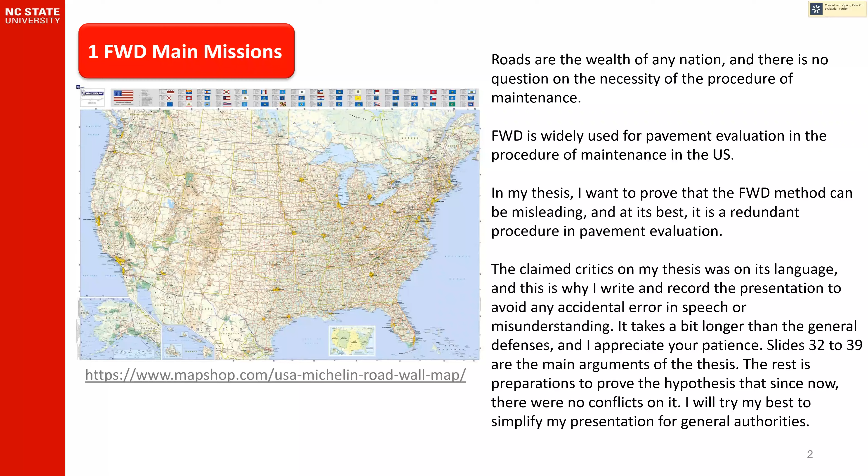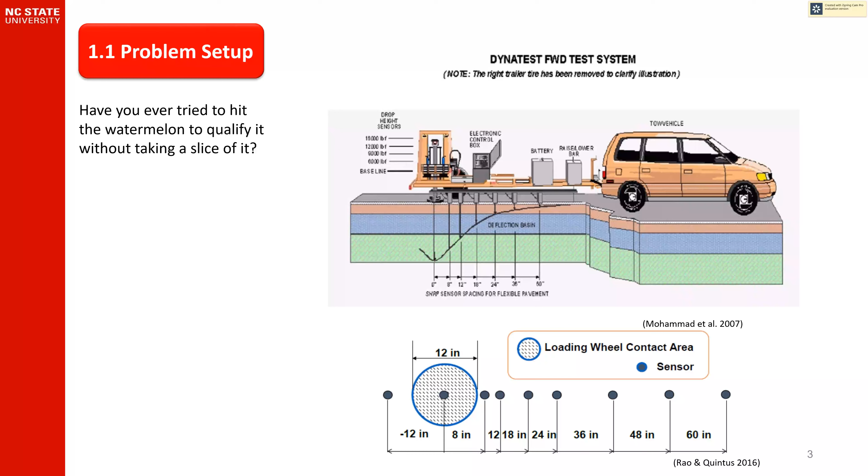Have you ever tried to hit the watermelon to qualify it without taking a slice of it? The idea is the same. We drop a weight on the pavement and we record its response at several distances. This is the area of the load, this blue circle, and in the center of that we have a sensor which measures for us the central deflection, at 8 inch, at 12 inch, and so on, with the hope that we can evaluate the condition of pavement by recording its response.

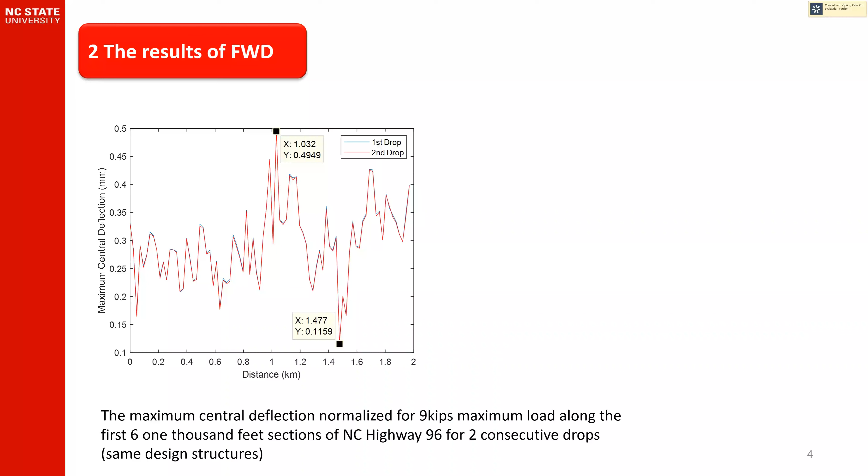We have 2 consecutive drops, and it shows us that at a single location, if we repeat the drop, it does not change much the response. We did it for the same design structure, so we did not use, for example, the intersections that have a thicker AC layer. As you can see, almost every 24-meter distance that we tested, we had a significant jump. For other sensors, the condition was not better either. Each point of the watermelon has its own specific voice.

What is the reason? Can we translate these point-wise deflections into some other quantities, such as a modulus of asphalt concrete or AC layer, which can be used for pavement evaluation? This idea that we change these deflections to some physical quantities, the properties of pavement, is called back calculation.

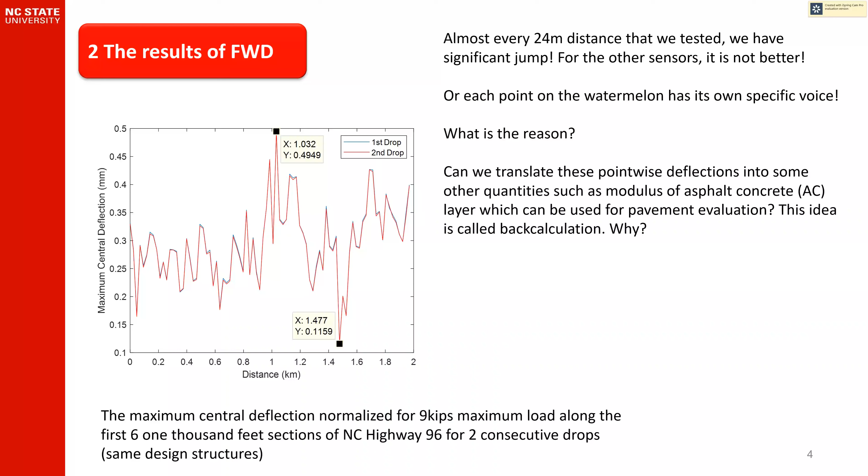But why is it called back calculation? It is because it is somehow backward. If we know the properties of pavement, most probably we are able to model that in a computer and then apply the load on that and see what is the response. But if we know the response, it is backward. So we want to know what is inside the pavement.

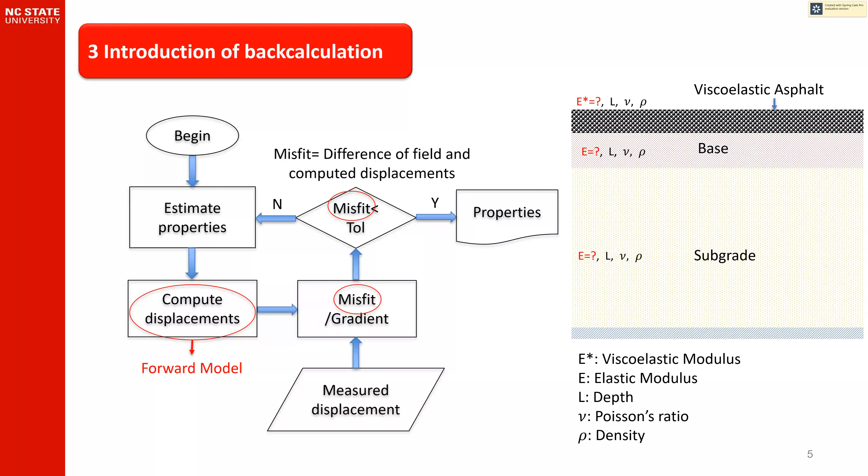So we should do it by trial and error. First we begin with an estimate, then we compute the displacement through a forward model, and we compare the measured displacement on the field with the forward model, and the difference we call misfit. If the misfit was less than tolerance, and we didn't face the problem of non-uniqueness, we assume we found the properties. But if it was more than tolerance, we cannot say that we found them, and we should go to the next trial and again estimate the properties, and this loop continues until we find the properties. This is called the procedure of back calculation, or inverse problem, inversion.

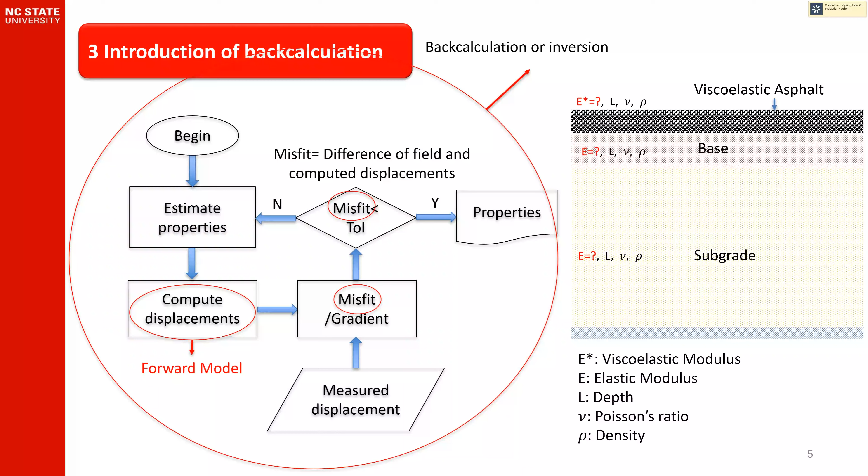As you can see, the forward model is a very essential part of that. If we cannot make a forward model, we cannot use this type of back calculation. There are unavoidable assumptions that all the programs in the literature consider, such as axisymmetry, continuity, and homogeneity, because we don't have in general information about the lack of axisymmetry in some pavement, or lack of discontinuities or inhomogeneity.

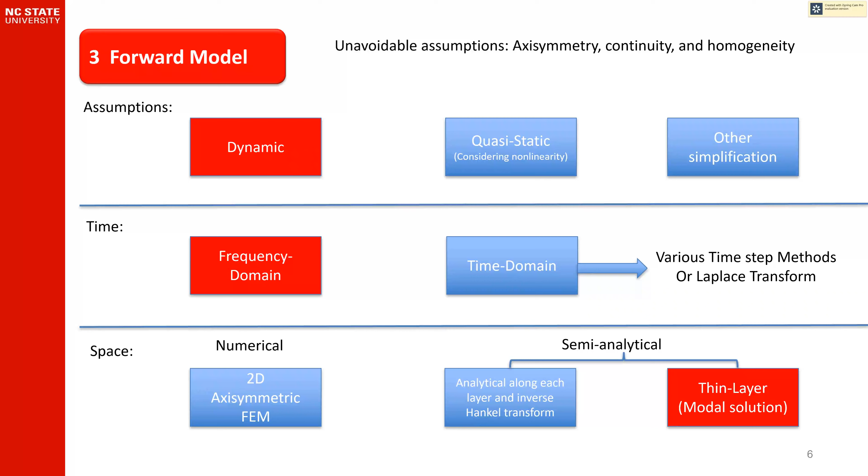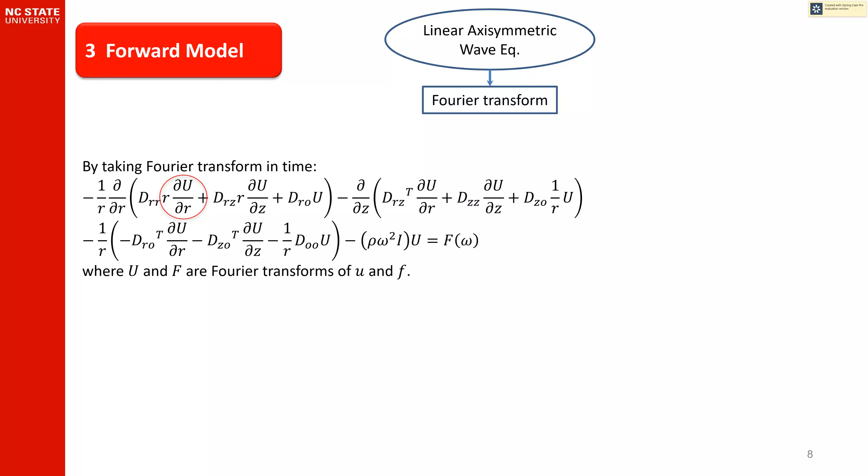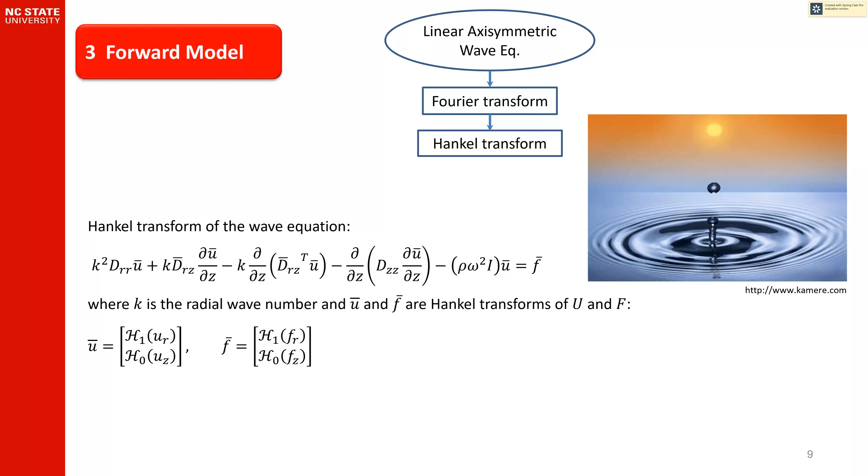Then we discretize in depth, and for the elastic layers we use CFEM, complex length finite element, which reduces the computational complexity because we want to consider the subgrade as half space. So we use a significantly large depth for subgrade, and if we use general finite element, we need to discretize it into many elements, which increases the computational complexity of solving the eigenvalue system. So we use the CFEM, which has exponential convergence.

You can see the details of that in my thesis, and also in its original paper written by Guddati, Druskin, Vaziri.

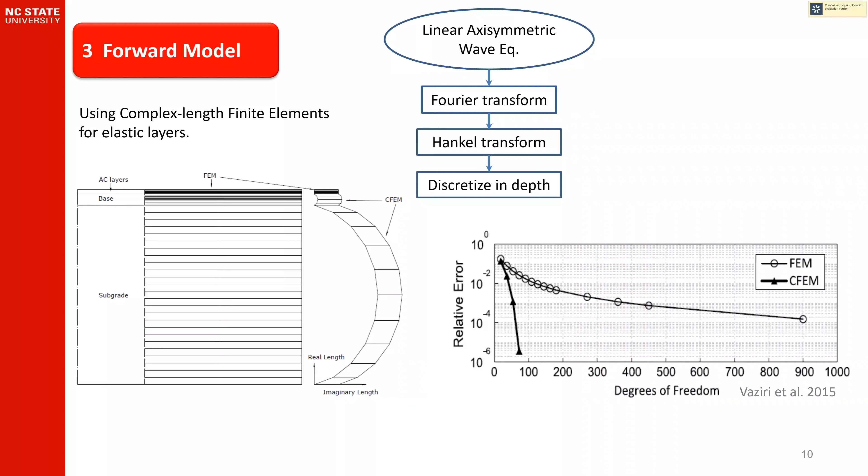So we have the system of equations. We solve for the general solution, and we find the eigenvalues, the radial wave numbers. In this case, we solve for the case which makes these matrices singular, and then corresponding to that, the eigenvectors, and then we have the modal expansion of that.

The closed-form derivation is made such that, based on each frequency in the vertical direction, and at each distance, you can find the vertical deformation.

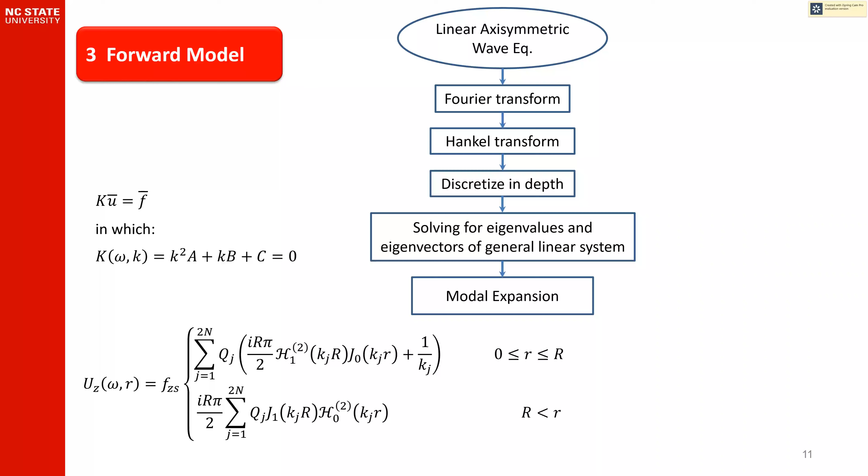To avoid solving this eigenvalue problem for every frequency content of the load, we use the Pade interpolation. The Pade interpolation is just division of two polynomials, one over the other, and it avoids the computational complexity, making things faster.

So instead of 10,000 solvings of the eigenvalue problem, we just use 40 Pade points and then interpolate in between. This was one of the ideas that was very helpful.

Then we can use the inverse Fourier transform and find the response in the time domain, which we can compare with the measurements in the field.

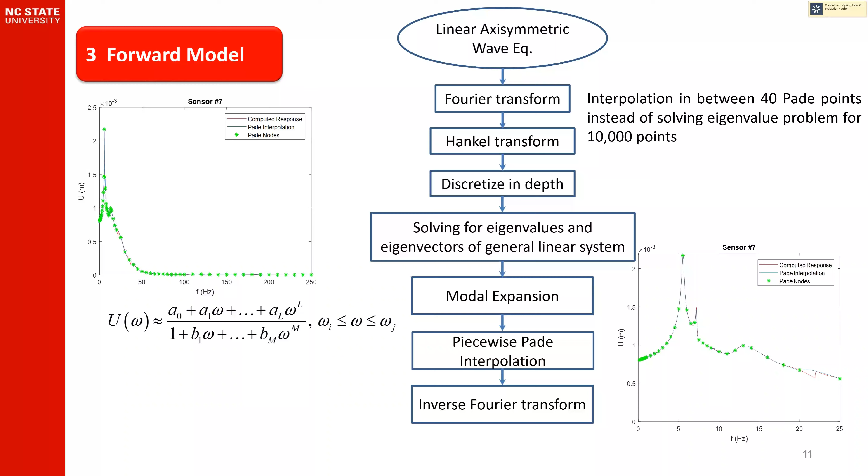So one of the main advantages of our forward model is that it is robust. For getting any intended level of accuracy, we can do a convergence study on that.

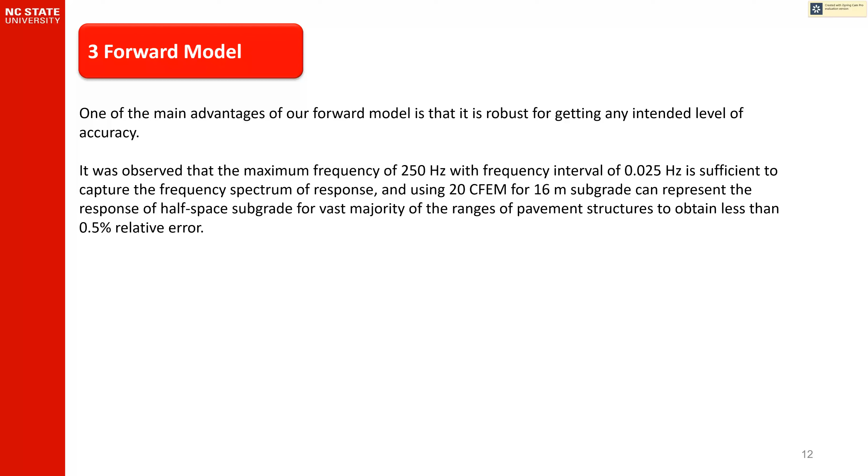It was observed that a maximum frequency of 250 Hz with a frequency interval of 0.025 Hz is sufficient to capture the frequency spectrum of the response, and using 20 CFEM elements for a 16 meter subgrade can represent the response of the half space subgrade for the vast majority of pavement structure ranges, obtaining less than 0.5% relative error.

So given the load, we can get the deflections at different distances, as you can see, from 0 inch to 48 inch in this case.

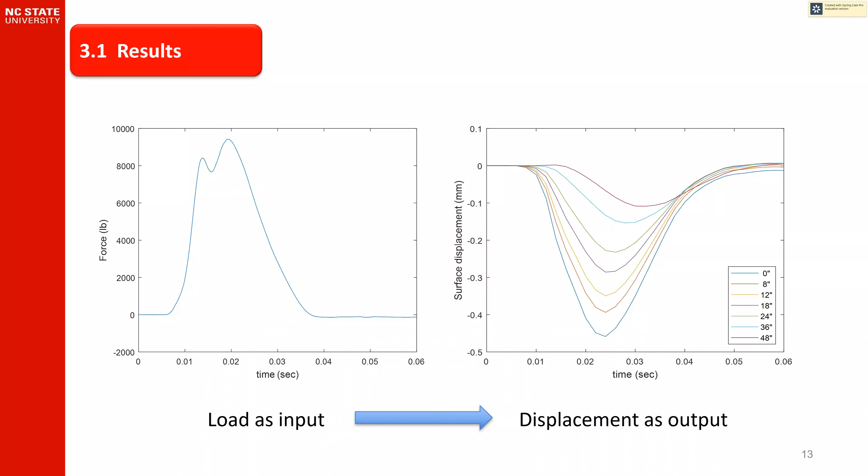So for validation of this forward model, the most important part is whether it is valid in reality.

We consider the NC96 pavement as a distressed pavement that we wanted to evaluate. The expert didn't observe any visible major cracks on the surface of the pavement, and we had 14 core samples that we tested out of 50 that were taken.

We found the modulus of the sublayers by dynamic cone penetration test and also previous data interpolations.

All 14 cases failed in prediction. For all 14 cases, the central deflection was significantly more than our predictions.

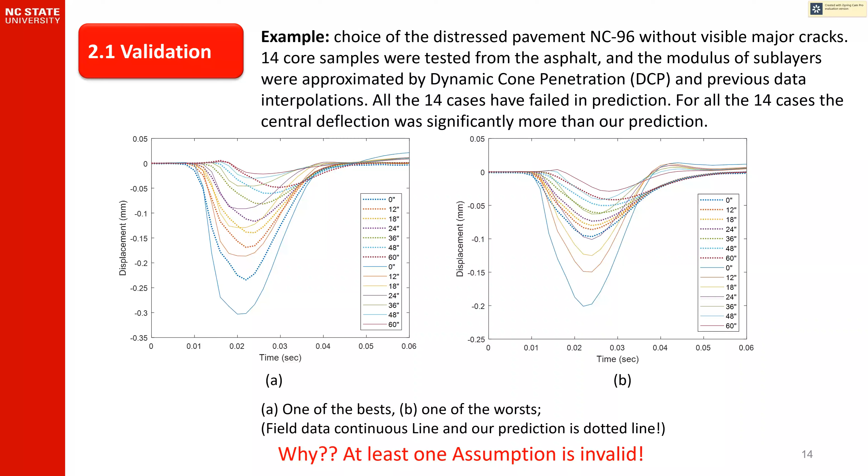As you can see, it is completely different, and sometimes we have even 100% error. Most importantly, the central deflection for all these 14 cases was always less than the experiment. Why? At least one assumption in our forward model was invalid.

So I make a hypothesis, and then I prove this hypothesis, as I will explain. So this is my hypothesis.

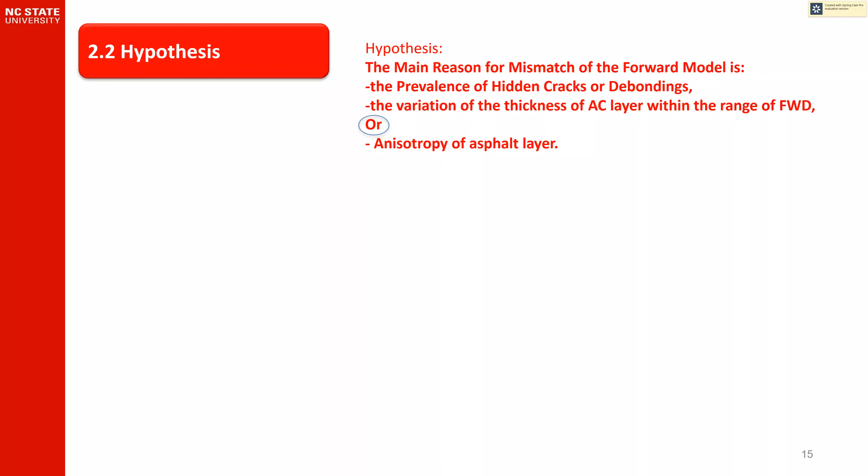The main reason for the mismatch of the forward model is the prevalence of hidden cracks or debondings, the variation of thickness of the AC layer within the range of the FWD, or anisotropy of the asphalt layer. Pay attention to this 'or' - at least one of these is true and significantly affects our data.

So first I explain the observation, what we observed through the field.

I explain the mismatch based on this observation, and then I refute the other likely possibilities. This is how I prove the hypothesis.

We observed 8 cases of debonding, major horizontal or vertical cracks, and stripping among 50 taken core samples, which we could not put under the dynamic modulus test machine.

Here is the schema: we have major hidden cracks or places of debonding, shown with green lines. We have the schematic size of a 6-inch diameter core as black circles, FWD loading area as a blue circle which is 12-inch diameter, area of 50 cores as the purple circle, and the radial distance of 60-inch for the last sensor of the FWD, shown as the red circle, to see the range of the FWD.

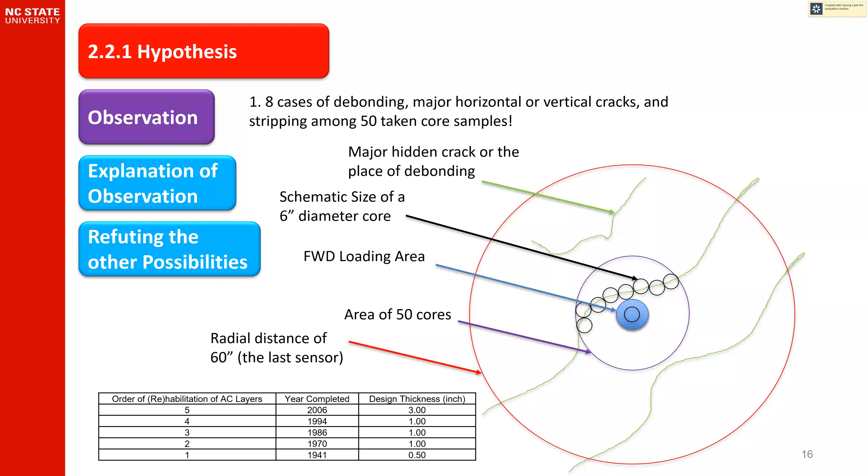The second observation was variation of thickness of the core samples from 18 centimeters to 27 centimeters for structure 1, along the 2 kilometers of NC96.

The third observation was that when we tested one of the cores in the vertical direction, we also took some horizontal cores out of that. We saw that the modulus of the horizontal cores was significantly less than the vertical modulus of the core.

Because the nature of the problem is bending, and in bending horizontal modulus is more essential to the stiffness of a structure, this is a very important observation that leads us to say that we cannot rely on the assumption of isotropy.

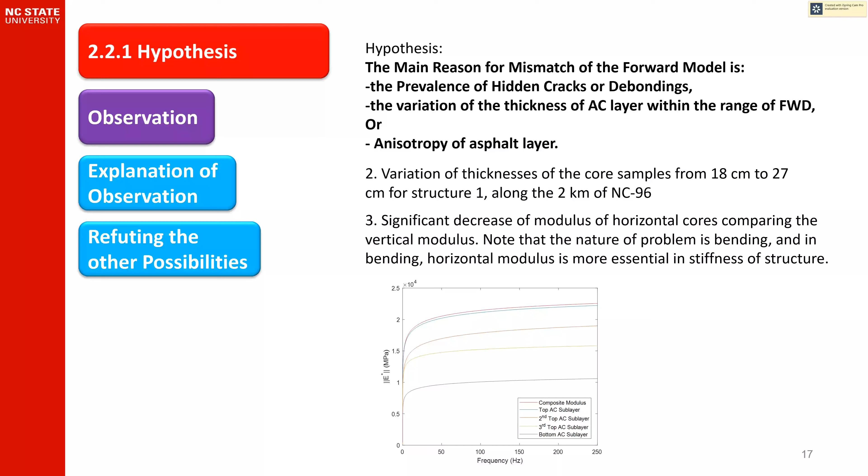We want to explain the mismatch in the data by these hypotheses, and we explain it with only two things. It might be possible to explain it by other factors, but explanation by just one of these hypotheses is enough to account for the observation.

Any discontinuity reduces our stiffness, thus increasing our deflection. If we have cracks in our pavement but assume it as continuous, we assume it as a stiffer structure, and then the deflections we find are less than the deflections we get in reality.

Also, if we have cracks that are in tension, they don't let energy transfer to the further sensors. For example, in this case between 12-inch and 18-inch, at 18-inch we suddenly had a drop in deflections—it seems the energy did not reach those sensors, and afterward also. So we can say these cracks are blocking the flow of energy, causing this phenomenon.

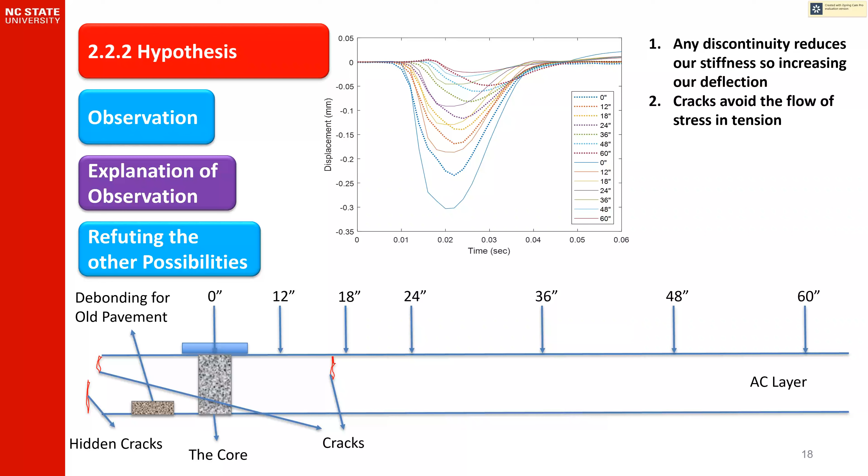For the other case, between 24-inch and 36-inch there was also a sudden jump in deflections, and the energy did not transfer. Remember this is just a plane—an axisymmetric domain—and these cracks and debondings can be inside the plane or outside of it, so anywhere is possible. By the way, these cracks are very tiny and could not be observed on the surface.

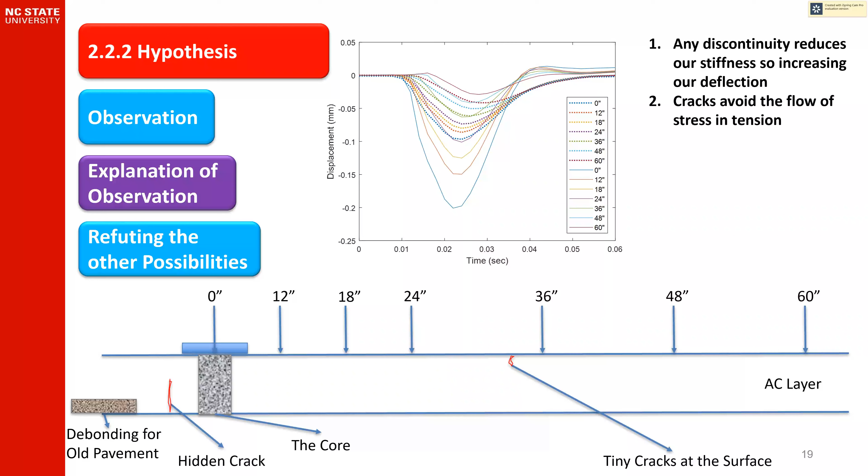Now we want to refute the other likely possibilities. Let's say we had inaccuracy in the approximation of input parameters. We want to adjust the input parameters such that, if we made a mistake in those, we could match the field data to our prediction.

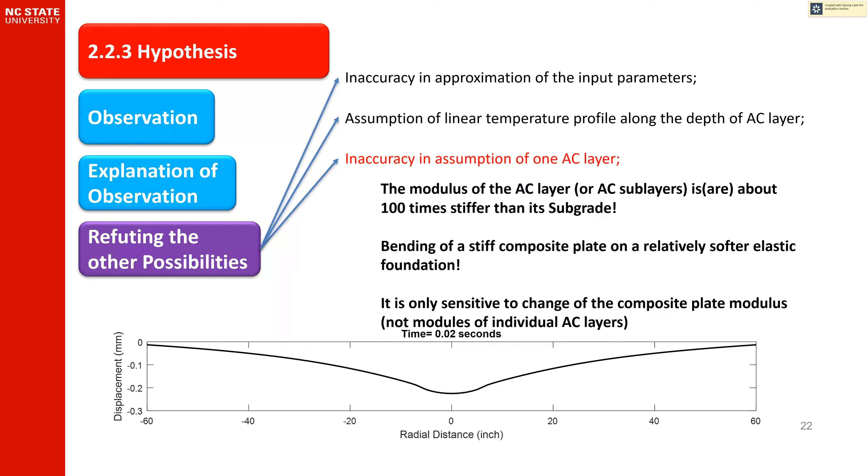We want to now show that it is only sensitive to change of the composite plate modulus, not the modulus of individual AC layers. Meaning that if we have the equivalent modulus of the AC layers as something, then if we change that composite modulus, we see the sensitivity. But if we go along the same composite modulus, then we don't see the sensitivity, and this is the space of non-unique answers that we faced when we were trying to do the back calculation.

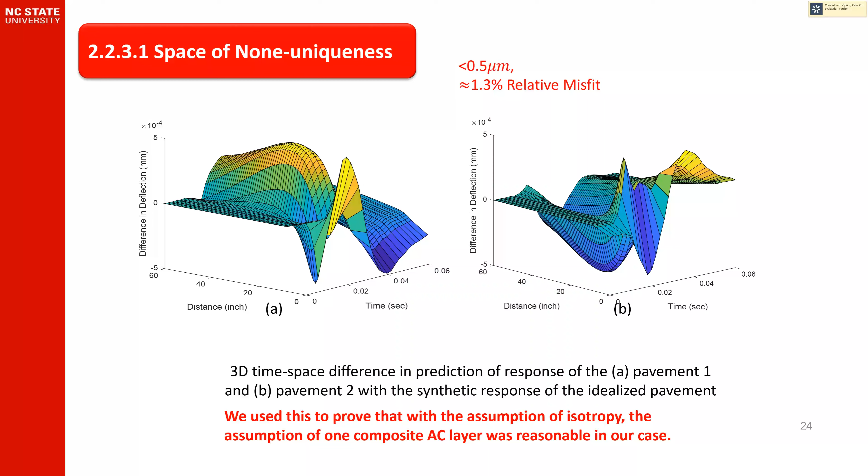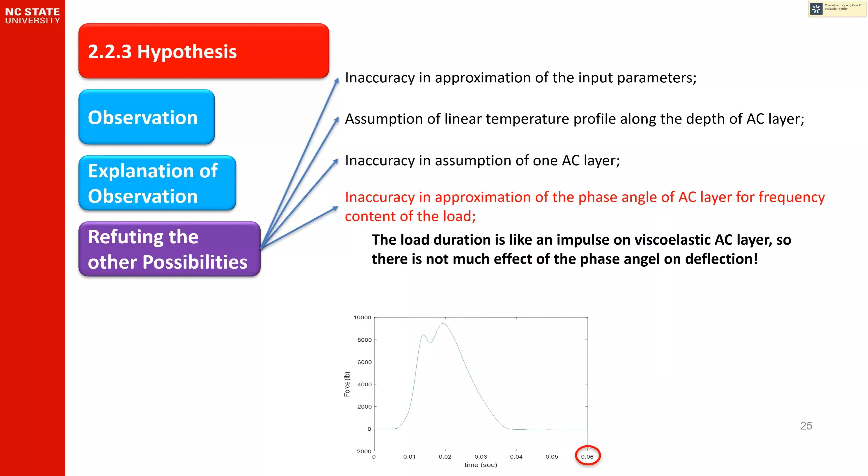What about the inaccuracy in the approximation of phase angle? I saw that the phase angle does not change much because we had an impulse, and this is the case for us. It is not changing more than 1%, with different approximations of that.

What about the inaccuracy in the extrapolation of the sigmoidal function? The frequency content of the response in the time history does not have that much share that we see the differences of that extrapolation. It is causing less than 1%, maybe 1.5% error in our deflection. So this cannot be the case either.

Error in the measurements of the field response - as we know, they do regular calibration based on the maximum deflection for FWD. So maximum deflection is completely matched, so it cannot be the case either.

And inhomogeneity within the mixture of the AC layer - because the different sizes of aggregates are not comparable to the size of our experimental setup, this is a good assumption that we consider homogeneity.

And also there was no accidental error. All these 14 cases had failed, and the 2 consecutive drops were also giving us the same deflection, so it cannot be the case that it was some accidental error during the experiment.

Also, there is no feasible method to gather the database for doing artificial neural network analysis considering the effects of these complexities. The artificial neural network requires a large database that, if we consider all the

possibilities that can affect our deflections, we gather the information and properties of those pavements and make a large database that covers all the possibilities. Then if we find the response of our pavement close to one of those possibilities, we can prove that there is no non-unique answer, so we can say that we found the properties.

So this is a way to avoid the forward model by computer. But since we don't have this database, and it is not a feasible method to gather this database for an artificial neural network considering the effects of these complexities - the cracks can be at any location, at any position - it is hard to gather, and also to know exactly where the cracks are, and the condition of that pavement. So this is not feasible either, and there is no guarantee that we do not face the problem of non-uniqueness for the artificial neural network considering the range of errors in field measurements.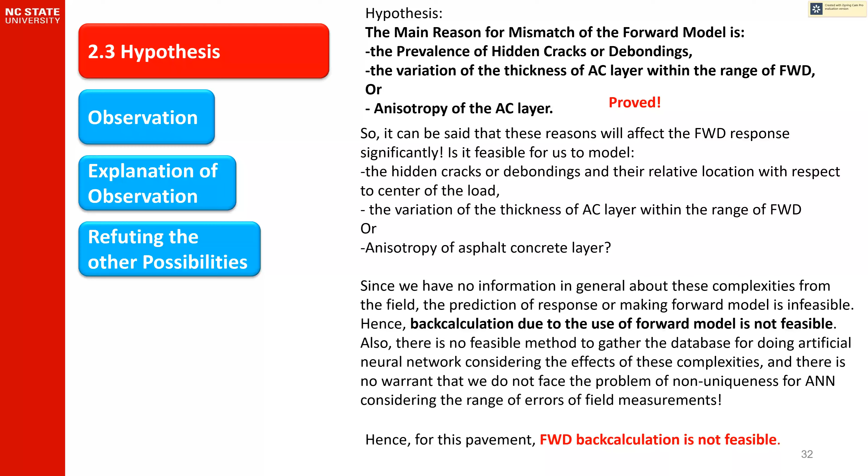Hence, for this pavement, FWD back calculation is not feasible. Almost every—

To answer the question we had initially in our lecture: can we translate these pointwise deflections into other quantities, such as modulus of the asphalt layer, which can be used for pavement evaluation?

No. This is only 2 kilometers of the 180 kilometer NC96. So obviously neither of these single points can be considered representative of the length of the pavement, and we cannot design the overlay or qualify the pavement by looking at any single point of these curves.

So there was an idea that instead of doing back calculation, we directly use these deflections in some way - let's say, for example, elastic back calculation - and then design the overlay based on that.

But the thing is, which one do we want to design for? Do we want to design based on 0.4949, or based on 0.1159? If we design for 0.1159, it might not be effective for 0.4949, and if we design for 0.4949, it might not be efficient for 0.1159.

We want to design for the length of the project, the length of the pavement.

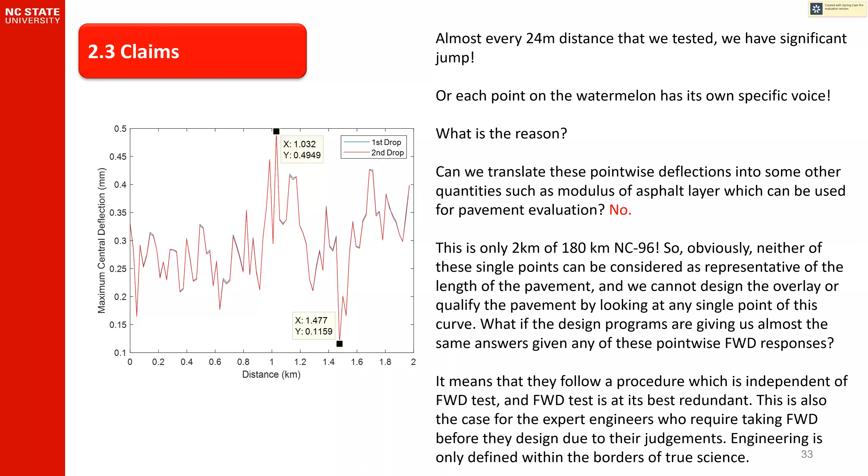So what if the design programs are giving us almost the same answers given any of these pointwise FWD responses? Maybe some design program says that even though I have high variation, I just give you the answer that is efficient and effective for all these. It means that all the programs are using only single FWD data currently, following a procedure independent of FWD test, and FWD test is at best redundant. This is also the case for expert engineers who require taking FWD before they design due to their judgments. Engineering is only defined within the borders of true science. We cannot claim something as engineering which is not scientific.

Someone may offer that we evaluate pavement by a sufficiently large number of these pointwise data. Can we? We use again our proved statement of hypothesis: FWD response is highly sensitive to prevalence of hidden cracks or debondings, significant variation of the thickness of AC layers within the range of FWD, or anisotropy of asphalt layer. Cracks or debondings always increase the deflection under the load, so any type of averaging technique will not eliminate their effect. If the cracks increase, so the average is also increased. It is not a random uniform or normalized distribution that cancels out these errors. This is why we need scientists to decide.

Also, we witnessed a high variation of the AC layer thickness along the pavement. Pay attention that along the pavement we had variation between 18 centimeters to 27 centimeters, as observed from the cores that we took, but in our hypothesis it was within the range of FWD. In general, the AC layer is significantly stiffer than its supported layers, and the variation of thickness of AC layer has a significant effect on the stiffness of the pavement and so its response. Core modulus proves that we cannot have a generalized anisotropy along the pavement. All the core properties were different, so we cannot generalize the modulus along the pavement. We have no information about any of these complexities to eliminate their effects by any generalized function.

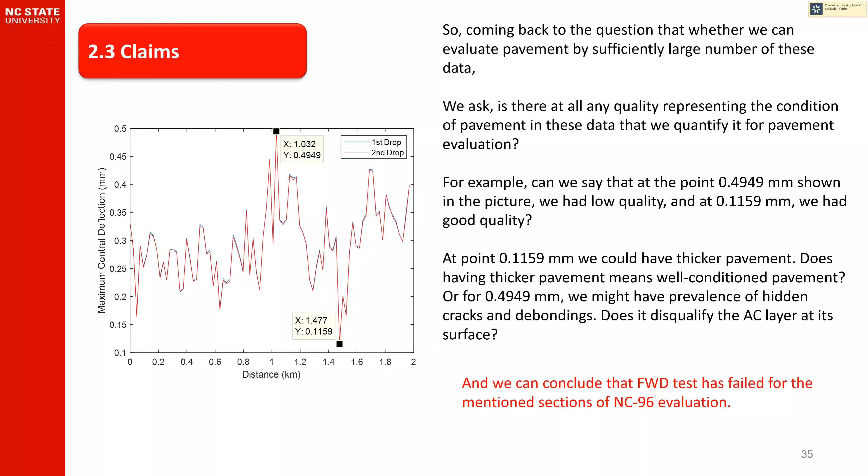So coming back to the question of whether we can evaluate pavement by a sufficiently large number of these data, we ask: is there at all any quality representing the condition of pavement in this data that we can quantify for pavement evaluation? If there is no quality, how do we want to quantify it? For example, if we can say that at point 0.4949 millimeter shown in the picture we had low quality, and at point 0.1159 millimeter we had good quality, can we say that? At point 0.1159 millimeter we could have thicker pavement, and does having thicker pavement mean well-conditioned pavement? Or for 0.4949 millimeter we might have prevalence of hidden cracks and debondings. Does it disqualify the AC layer at its surface?

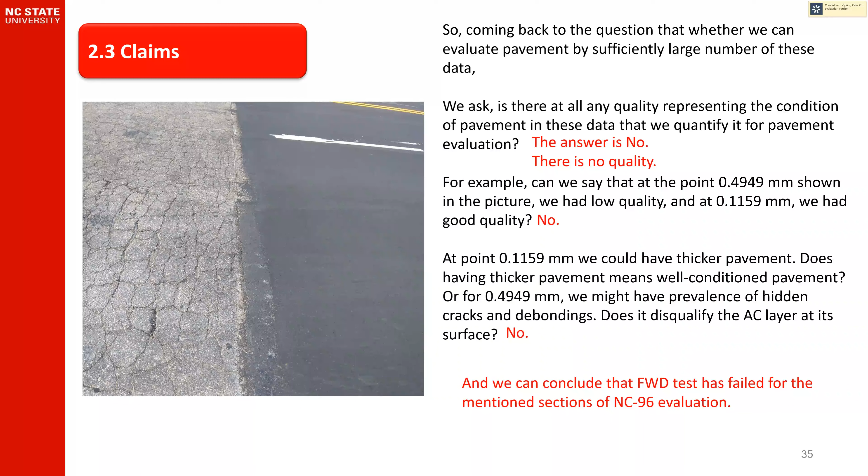Here I took this picture just on Avent Ferry Road, in front of the Burger King. There is just new asphalt on top of a very distressed pavement, and this does not disqualify it. When we have hidden cracks or debondings under the pavement, it doesn't disqualify the pavement on its surface. So the answer to all these questions is no, there is no quality. And we can conclude that FWD test has failed for the mentioned sections of NC 96 evaluation.

Definitely it failed. Can we generalize that FWD fails for all pavements? No. Right now in my thesis I don't claim that, but I was also able to prove, based on my program, that even for the idealized pavement, because of the non-unique answer and the lack of accuracy in the measurements and known and given parameters, we cannot do the back calculation even on the idealized pavement. But now I just consider no. We don't conclude right now, and we don't need to conclude, and we see why.

What we refuse is the reliability of FWD. Without any proof, FWD companies are charging taxpayers for their claimed experiment. We found that it is not working. For example, we proved by rejecting the general statement that it is a reliable test, widely used, by a contradictory example. So we have the right to say it is not reliable as a general statement, before they can prove what are the limits of the application of their proposed method.

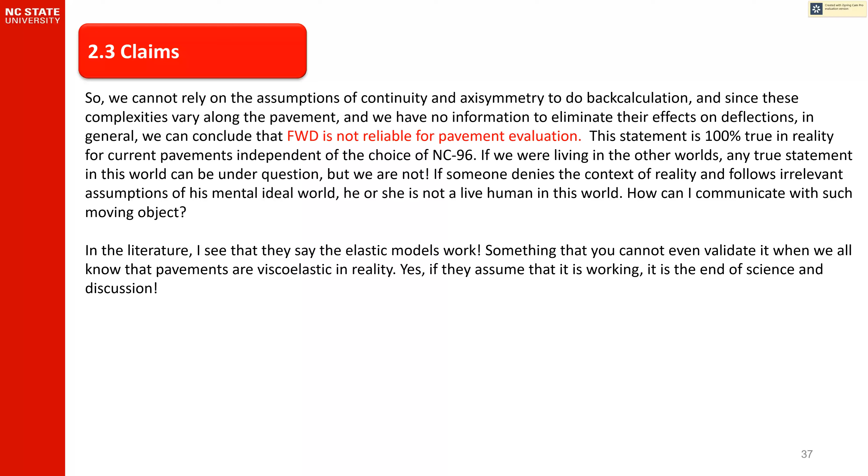In the literature, I see that they say the elastic models work, something that you cannot even validate, when we all know that pavements are viscoelastic in reality. So all these years they were assuming something, and they made programs for that, that you cannot validate, you cannot see if it gives you something true. And then they say that it works. If they assume it is working, it is the end of science and discussion. If you assume something is true, there is no discussion on that.

So in summary: can we do back calculation for this pavement? No. Can we rely on any single of these data points for our design or decision making for this pavement? No. Is it essential for trustworthy design programs or experts to have FWD data for this pavement? No, it is redundant. Does obtaining many FWDs along the pavement help? No. Can we qualify this pavement with FWD data? No. Can we rely on FWD for evaluation of the other real pavements? No. Is it making life easier and better for society to continue FWD tests? No.

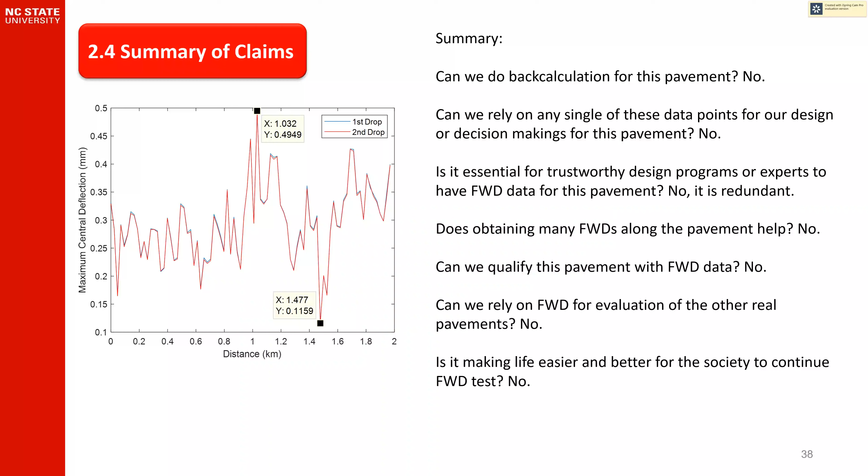They ask, what is the alternative if you say we do not take the FWD test? This question does not justify continuing unreliable methods. First, pavement engineers must reach a conclusion about what parameters they need to know from reality, and then they must decide about designing and applying reliable methods.

What about the number of jobs that will be lost? They say, you want to take our jobs. So a job is only justified when there is a need. Yes, there is a need for maintenance, and maintenance is very necessary. But it does not mean we should do nonsense experiments to find out what. Nowadays governments, all the jobs, if there is no need, it is actually a burden, it is not a good thing. Nowadays governments all around the world are keeping their nations in need and busy with nonsense jobs. This man-made unjust slavery has to change.

Someone may say that these assumptions you refuse, such as continuity, isotropy, and axisymmetry, are the accepted assumptions for many pavement programs, and pavement researchers have accepted them as accurate. I do not claim that all programs considering pavement with those assumptions are unreliable. However, researchers must search for clarification of the truth in reality. They must not seek credit, for example writing and publishing papers, by falsifying the interpretation of real conditions due to unrealistic assumptions.

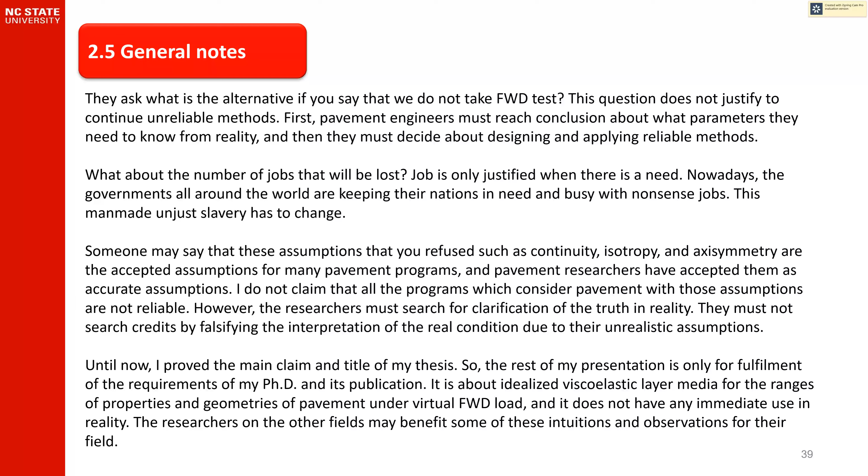So the rest of my presentation is only for fulfillment of the requirements of my PhD and its publication. It is about idealized viscoelastic layered media for the ranges of properties and geometries of pavement under virtual load, and it does not have any immediate use in reality. Researchers in other fields may benefit from some of these intuitions and observations for their field.

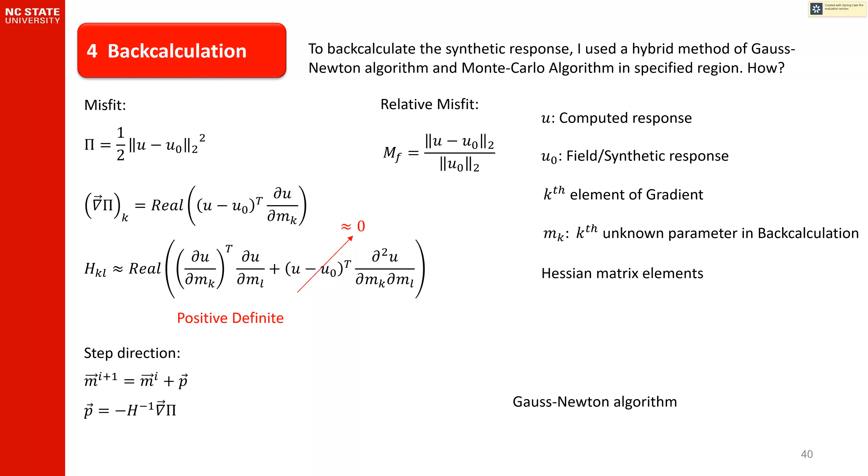I did the back calculation using a hybrid method of Gauss-Newton algorithm and Monte-Carlo algorithm. You can see the formulation—this is the misfit, the difference between the synthetic data and the computed response. We find the derivative of that based on each parameter as a gradient and also a Hessian matrix, which we simplify to positive definite, and use the Gauss-Newton algorithm for the step direction. For getting the derivative we use finite difference, because it was cheaper than the other two methods, and you can compare it with the analytical derivative.

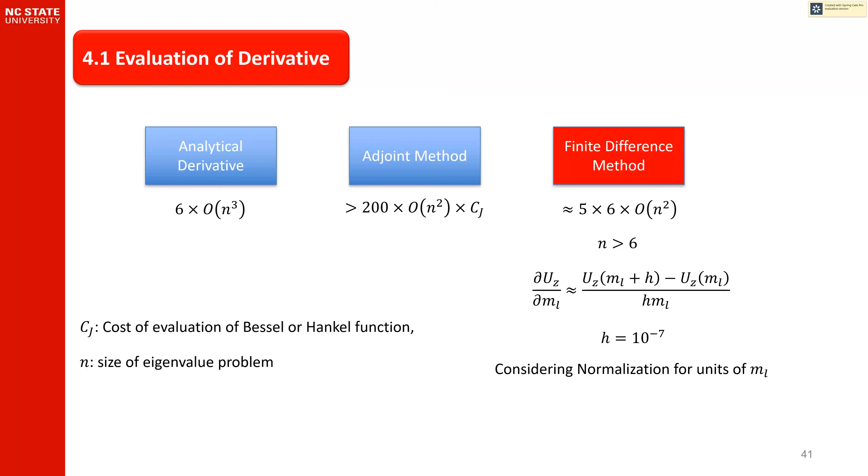You can see in the appendix of chapter 4 the derivation of that, which might be helpful for other researchers. We use a time limit because we had a truncation in the response, and we use the truncated power law for approximation of the viscoelasticity.

We could not find more sensitive parameters, so we use just two: E star at 5 Hz and E star at 40 Hz. We saw that it does not vary for a variety of sigmoidal functions if we consider the sigmoidal function and all its parameters, so we just use this truncated power law. The prediction we have for the synthetic data does not vary more than 2%, and 2% is much better than the accuracy we have from field measurements.

I see in the literature they say, we find for you even the thicknesses, we find for you the time-temperature shift factors, we find for you all 4 parameters of the sigmoidal function—whatever you ask, we give you. They should not do that. This is not honesty, since we don't have sensitivity to claim about those things. Also about the phase angle, I use the slope of these curves.

So we have eventually only 4 parameters: the modulus of the AC layer at 5 Hz, the modulus of the AC layer at 40 Hz, the elastic modulus of the base, and the elastic modulus of the subgrade.

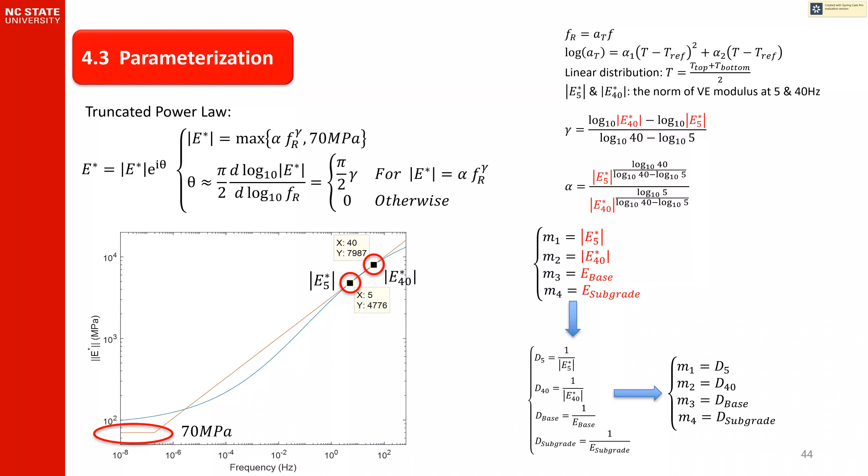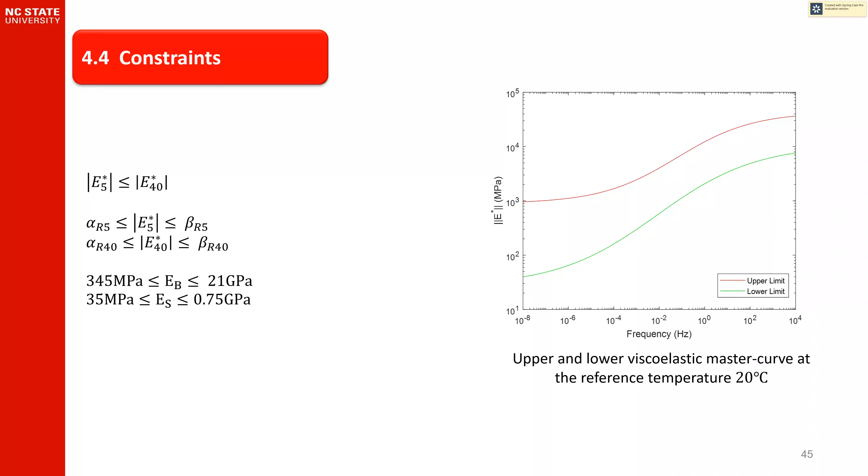These are the boundaries that I explained in my thesis—these are the constraints we have. The back calculation we do is under these constraints, which you can find in my thesis. Basically the goal is to minimize this misfit, which is the relative misfit, and the stopping criteria can be 0.1%. We use this very low value to say that our back calculation is robust for the vast majority of cases, and we also used 5,000 evaluations of the forward model as a stopping criteria so it does not run forever.

So we begin, and also the Monte Carlo region—you can find the details of that in my thesis.

So we initiate with an initial guess, and then we go through the procedure of Gauss-Newton, 10 Gauss-Newtons, and if we couldn't find less than the misfit, then we go through the Monte Carlo algorithm. If within the 250 we found another answer with less misfit, we again go to the Monte Carlo, but if we couldn't, we add 1 to the counter and go back to the Gauss-Newton algorithm. We don't let this loop go more than 5 times, and if we couldn't find the required misfit, it uses another new initial guess.

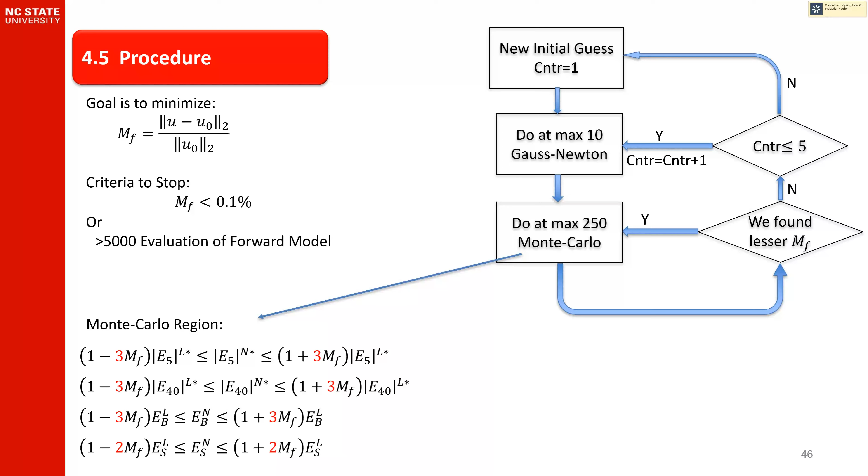And this procedure, as I mentioned, we don't let it go beyond 5,000 function evaluations for the method evaluation. So we can find what should be our misfit for different systems, and we can study that.

As you can see, it is like a line in the right hand side figure: if we have 0.1% error in misfit, then we face less than 2% maximum error in all the parameters. So for this level of accuracy, we need this misfit, and you can find the same for other levels of accuracy. But problem to problem, it is different. In this case, we found the answers in 1,300 evaluations of the forward model.

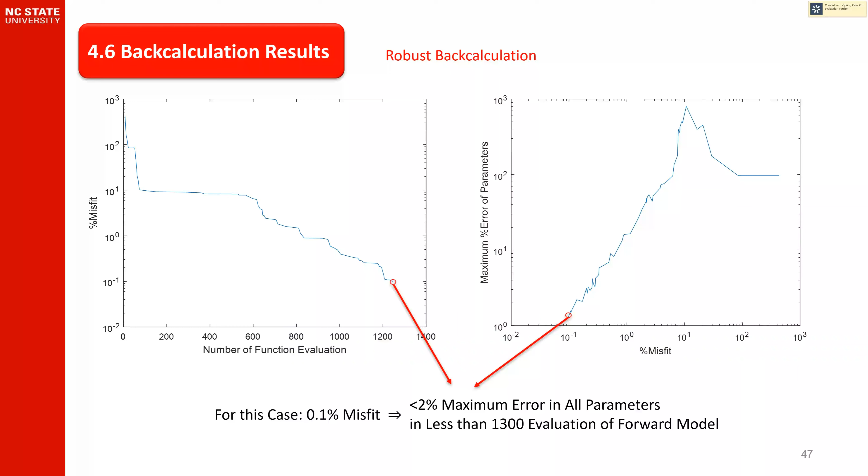So I did this for one viscoelastic layer, but my program also has the option for doing back calculation on multi-layer systems, though I do not warrant anything about that. It uses deterministic known parameters such as depths, Poisson ratios, densities, time-temperature shift factors, and temperatures, and it considers different ranges of temperatures from -10 degrees Celsius to 70 degrees Celsius.

I should also mention that for more than 4% misfit, I observed an extremely large space of non-uniqueness for all the cases, even synthetic data with no noise, due to the large relative errors of approximating input parameters and lack of any claim on the accuracy of FWD measurements. Because we face these large relative errors in input parameters, and the inaccuracy of FWD measurements which is more than even 10% error, with 4% error I saw that it covers all ranges of pavements, and even beyond that we don't get anything that makes sense. So this is not feasible even for idealized pavement—thus, even for idealized pavement, back calculation is not feasible.